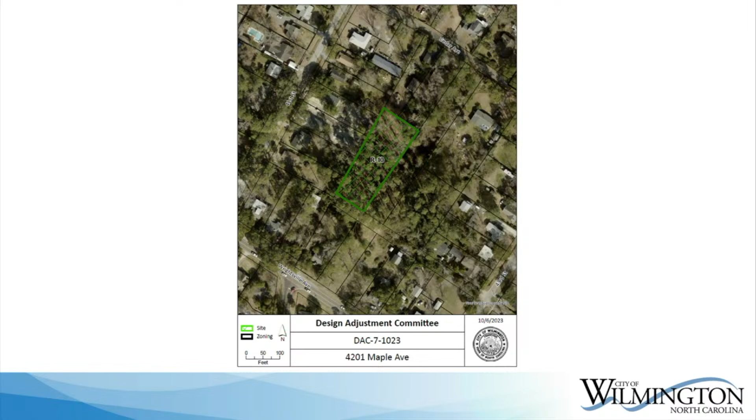The applicant has revised their plans based on discussions at the last meeting, and they are requesting a design adjustment from the minimum standards for a minor street and a minimum corner radius of a roadway. Your case summary has been updated to reflect these changes. There were originally 4 separate adjustments requested, and that's been narrowed down to 2. The relief from the minimum tangent length for a roadway has been removed, along with the standards for the residential driveways. That waiver request has been removed as well.

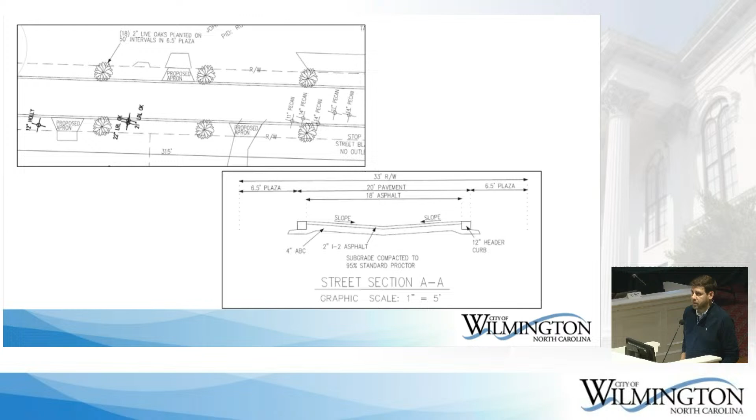On your screen is the revised plan submitted by the applicant, showing the proposed Maple Avenue right-of-way, now showing 20 foot in total pavement width. I also have, for your reference, some detailed plans of the cross-sections, the proposed tree removal, which was discussed at the last meeting. And here's the previous site plan with the requested adjustments that was provided at the last meeting as well.

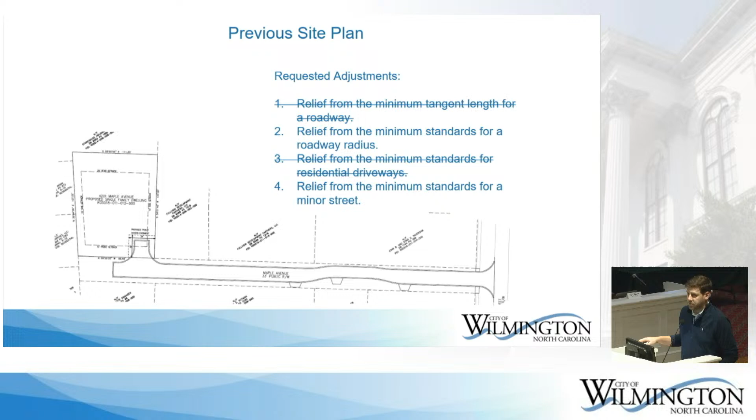Just to back up a little bit, again, wanted to hit on the fact that this is a non-standard minor street cross-section, and they are providing access to 4201 Maple Avenue from 43rd Street. The applicant, again, is proposing that 20-foot radius at the roadway edge rather than 35 feet. And then they are requesting 3 separate waivers for the cross-section, and that is no sidewalk on either side of Maple Avenue, the typical crown cross slope, and the applicant's proposing an inverse crown, and then the 40-foot right-of-way, which is an existing condition. There's existing 33-foot right-of-way for the site.

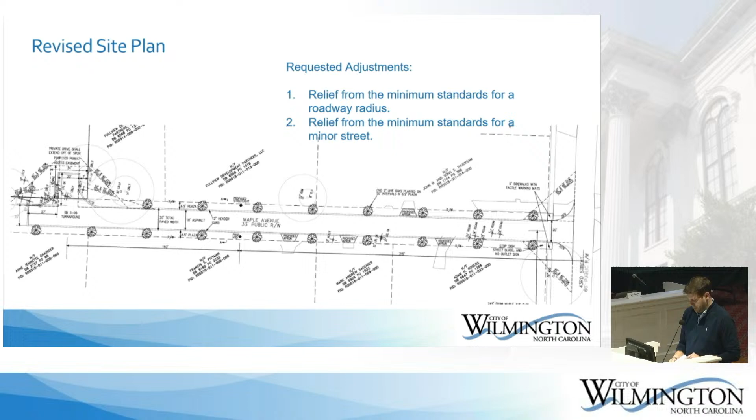So I've also provided the waivers that were eliminated. Those are the changes proposed by the applicant. I'm happy to answer any questions. The applicant's here as well. I ask that this updated report be entered into the record. Happy to answer any questions.

I have a real quick question, just to clarify, and maybe this is an applicant question, but I think the primary issue at the last meeting was that 21-inch, I think it's labeled as a laurel oak. Yeah, there's a couple of them. It's multi-stemmed, and our arborist actually went out there to confirm that. It was mislabeled. It's a live oak, a double live oak, 22 and 21-inch, that's being proposed to be removed with this proposal.

Okay, so it is being proposed to be removed with this, but the pecan tree clusters there closer to 43rd Street, they were going to be removed in the previous submittal as well? Yes, in both submittals. Okay, so there's no change to those? Correct. So the biggest change as far as trees go are those 2 live oaks? Correct. Okay, thank you.

Any other questions for Pat? Thank you. I'll probably have more questions later, but thank you. Does the applicant wish to speak?

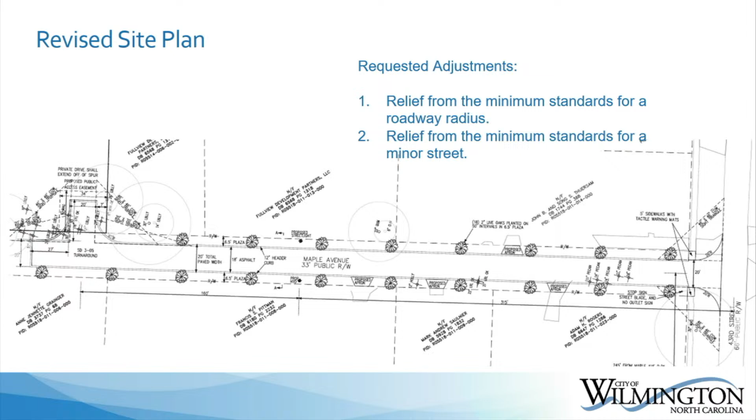Leaving the meeting last month, I thought I'll take a cue from another arborist I spoke to one time that said the best thing you can do is plant new trees today if you can't save a tree. So I came up with this alignment without sidewalk to make room for street tree plantings, and that's how I was prepared to defend that alignment today. But in light of the arborist report yesterday, I would like to defer back to that original alignment. So we may need to discuss zero tangent lengths, narrower road width, offset pavement, and get back to where we left off last time.

Okay. Does that make sense? Staff mentioned that that was something we could proceed with, if that's okay. I know we've got the exhibit still in there. Yeah, I guess the question for the attorney's office, is that acceptable to still discuss the item? What seems to be presented in this packet is an updated alignment. Are we still able to consider the previous alignment from the last meeting? Yes. Okay. It was included as another attachment, the previous submittal.

to this packet. And if any aspect of this alignment is found to not be palatable to the board, or you feel like it's too big of an ask, then the alignment that I turned in a couple weeks ago is something I'm willing to discuss further and defend. In either case, I would like to express strongly my desire to omit sidewalks.

Because of the 33-foot right-of-way, when you put the road in there, you've got a 6.5-foot shoulder between the right-of-way line and the edge of pavement. If you put a sidewalk in there, you've just forfeited street trees. So whether it's replacing a tree that you have to take down or augmenting, we are going to take some of those pecan trees down at the entrance. So there's opportunity to replace those with live oaks or some other planting. And I do want to see that on the plan.

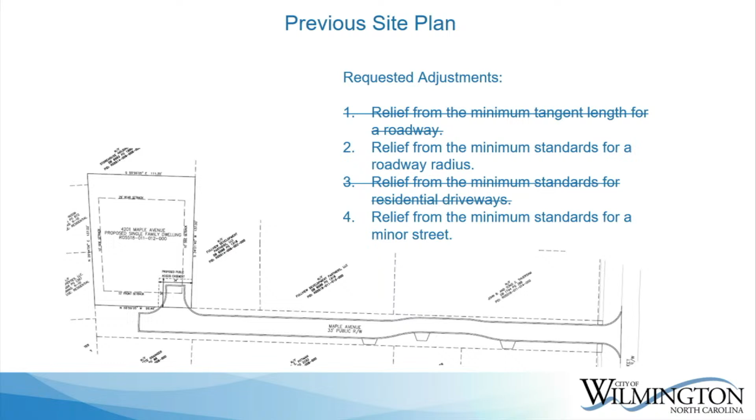One thing I want to bring up is there's an elephant in the room, and that is as you look between my lot there in the corner, which has a lot of frontage on this street, 210 feet. Fullview owns behind me, Fullview owns the next one, and I believe the same person owns the 3 lots that are facing Wrightsville Avenue, 2 of which are pretty much untreed. And what I'd recommend is that a similar, very wise city decision be followed from the late 1990s, which I asked one of the planners about yesterday.

And that is the Eagles Nest condos accessed off of Kerr Avenue, down Maple, and blocked off on Maple beyond the paving to the parking lot of Eagle Nest. It was a wise decision by the city not to take traffic through Maple to 43rd Street, to keep 43rd Street a residential street as it should stay. If we dump more traffic on 43rd Street, it's going to head for Wrightsville Avenue, which is always backed up, especially rush hours. It's hard to get out there in traffic.

So the Eagle Nest condominiums was a wise decision to take that traffic from Maple Avenue out to Kerr Avenue and not dump it on 43rd. We hope that same kind of idea can be followed on our side of 43rd Street. Those vacant lots that face Wrightsville Avenue, we encourage the city to look at accessing this lot in question that way, and the other lots.

The elephant in the room is that big acreage there, which we assume another applicant's going to come forward wanting to develop that property, and it's going to add more traffic to us. And each unit's going to have at least 2 cars, maybe 3. That's going to dump an awful lot of traffic going past my house and anyone else who lives on Wrightsville Avenue there, accesses from the rear.

And lastly, drainage. Whatever is done with whatever alignment, whatever paving, has to take into consideration the poor drainage all around our entire block. Wrightsville, 41st, Cedar, and 43rd is a mess. Somehow there has to be some logic applied and maintenance applied to that entire block, so during storms we have proper stormwater drainage. A big problem we have right now is with a heavy rain like we had a few days ago, there was a lot of water backing up that doesn't drain anywhere.

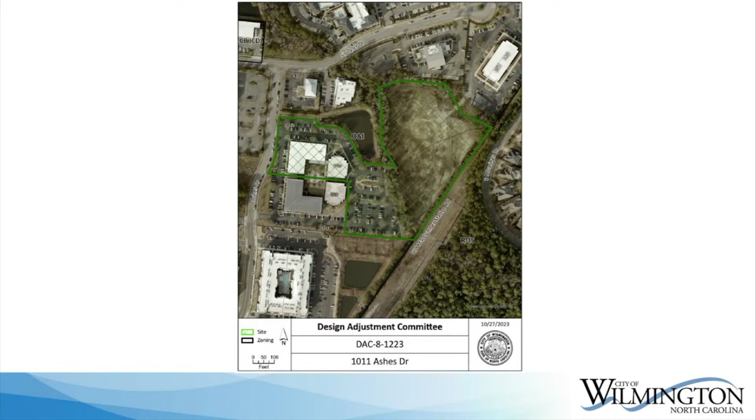Item number 2 is the next item. We okay? We don't need a recess, right? Megacorp Logistics. Thank you again, Mr. Chair, members of the DAC. Yes, this is a request for a design adjustment for Megacorp Logistics, 1011 Ashes Drive. This is for a commercial parking lot. This request is for a design adjustment for the length of a private driveway.

The site includes approximately 5 acres. It's currently undeveloped and is zoned O&I. The site does not currently have direct road frontage on Ashes Drive. It is adjacent to the Megacorp Logistics office building. That would be to the west there, and it's highlighted on your site plan shown in front of you. A previous request did come before this committee. That was DAC-6-1023 and was denied by the DAC. That was on October 18th, 2023.

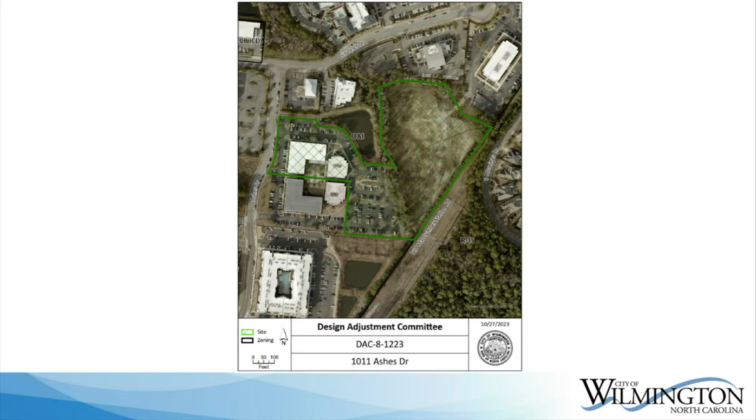Since that request, we have received a new submittal. The applicant has proposed this revised site plan that's in front of you. This includes the same connections to the Megacorp site, which are the red arrows shown on your screen. They have revised and provided some additional connectivity to the north to the adjacent property. They are showing an adjacent emergency vehicle access to the property to the northeast. Those are the green highlighted arrows shown on this slide. And then they've also shown some additional interconnectivity between parking lot drive aisles. I've got a slide as well that I'll show you to kind of compare the two proposals.

The specific request for the design adjustment is that the length of a private driveway shall not exceed 500 linear feet. The applicant has gone beyond that maximum requirement, I should say. A total drive aisle length is approximately 1,280 feet, and that is provided by the applicant, their engineer. Let's see, these are the existing conditions. This is just showing the current Megacorp layout. And this was the previous plan. And here's the comparison between the two, previous plan being on the left side and their current plan proposal on the right.

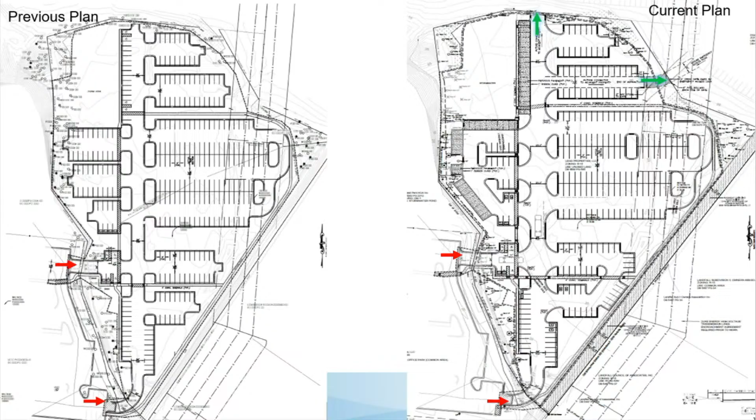Again, this is for a proposed commercial parking lot use. That is a use permitted by right. Doesn't have specific parking standards per code. However, for an office use, maximum parking standards are 1 space per 250 square feet of gross floor area, just for your reference. That concludes my presentation. I'd like to enter this report into the record. Happy to answer any questions that you have. The applicant's here as well, I should say.

Pat, hey, I know this was discussed at least a little bit at the last meeting, but I do want to clarify, I'm not seeing it. So how far is it from the roadway to basically the tip of the red arrow there now? And then, I guess you said it was 1180, I'm presuming that's to the furthest point. 1280. But how non-compliant is it? Right. So this is based on math that I asked from the applicant, and I provided in the report. 1280 is the total feet back to Ashes Drive. And so that would be 780 feet in excess of the 500 foot.

Are they over 500 to the beginning of the parking lot now? I don't have that calculation. I'd probably defer to the applicant on the current length for the existing parking lot. Okay. And is there any proposed phasing to this parking lot, or is it proposed to be built all at one time? I believe it's supposed to be constructed all at one time. It's currently under TRC review, and I don't believe there's any phasing proposed. Okay, and I have some questions about the emergency accesses, but I'll save those for the applicant. Okay. Thank you. Any other questions for Pat? Thank you, Pat. Does the applicant wish to speak?

Can I still speak, Rob? Yes, Shane, thank you. There is sidewalk running to the north on that string of pervious parking spaces to the north, which could be extended to that property line. And then we have a sidewalk that runs to the west, just south of the green emergency connection, where there could be a little stub, and we could go to the property line right there. It's close, but that would be an easy adjustment to put that connection up there, and it does connect back to the main Megacorp.

Okay, so if they leased a facility in that property to the northeast, they could provide a pedestrian connection to that property. Yeah. And then I assume the intent would be at that point, they would make a full vehicular connection between those parking lots. I mean, that's ideal. That would eliminate almost all of my concerns. Yeah, and not to muddy the water any, but in terms of the DAC, to go out that green connector and loop up through to Ashes Drive, it still exceeds 500 feet. Just wanted to note that.

Sir, one more question there. I noted one of the differences in this site plan and the previous one was the two southernmost parking areas were connected to create kind of a ring. Is there a reason that could not be accomplished on those two northern ones, just for general traffic flow within the parking lot, so that somebody's not thinking, oh, this one's a dead end, I gotta back up? Yeah, Dennis, I don't see why that couldn't be done.

I know some of it was the length of how far the fire truck needs to go to back up, and it wouldn't exceed that amount. So from that very northern parking space, a little loop connector down would connect just behind the stub for the emergency vehicle access. I think that's reasonable. That's like the adjustment you made from the previous plan on those other two. Mm-hmm. That's a great comment. I was looking at that same option. We can do that. Any other discussion on this item? We do need to get to a motion, depending on how everybody feels about it.

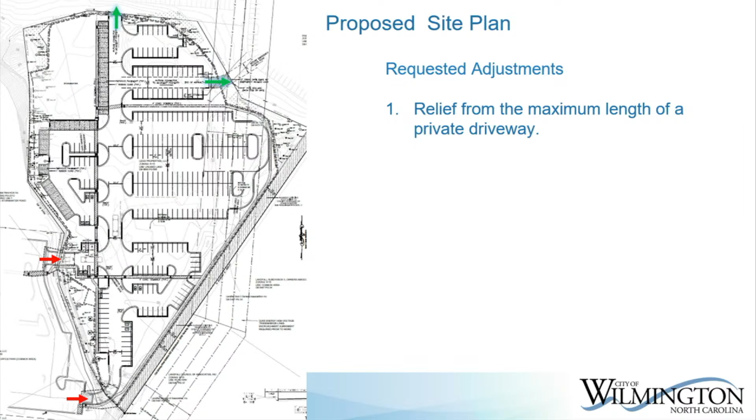I feel like personally for me, if they want to do the balance of this, which seems like it's more in line with the future expansion of Megacorp, they need to have some kind of a connection. I mean, I don't mind if it's emergency access. Hang on, sorry, we're beyond that at this point, but.

Yeah, I'm keying in with what was just mentioned, that as I understood, the reason why this is written into the technical standards is because of emergency vehicle access and the distance from a main thoroughfare. The addition of emergency access roads are proposed, but I am agreeing with him, if we have no guarantees of that, because we're requesting a variance of such a long distance, we're going to be right back in the same boat unless this is solidified, yes, this is a done deal, we have connectivity. But as of what we're looking at right now, it's proposed.

What do you think about the option of unconditionally approving that lower phase and then conditionally approving the upper phase? Does that make any difference to you? I can support that. Okay. I feel like that's my motion, and I don't know how to delineate that on the plans, but Pat or whichever staff is going to be looking at that, you see that little grayed out vehicle sitting on the screen there? You got a laser pointer? Do you know where I'm talking about? Yes, right there. That's it.